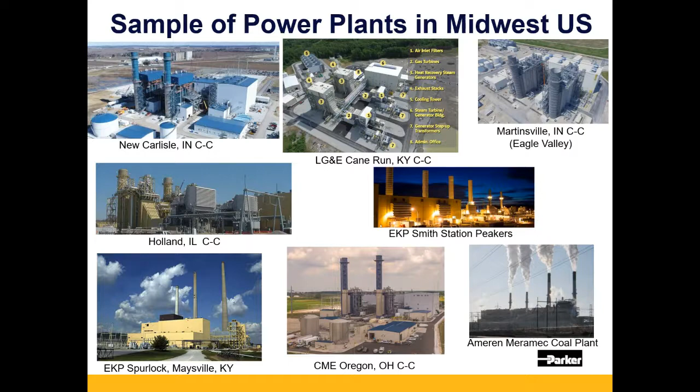So real quick, this is just a view of some of the power plants across the Midwest U.S. We provide products into pretty much every type and style of power plant that's out there. But as many of you may know in the industry, there's been a steady shift from coal to gas. So we've seen a vast increase in the amount of combined cycle plants, but still coal plants provide a significant portion of the base load today in this region.

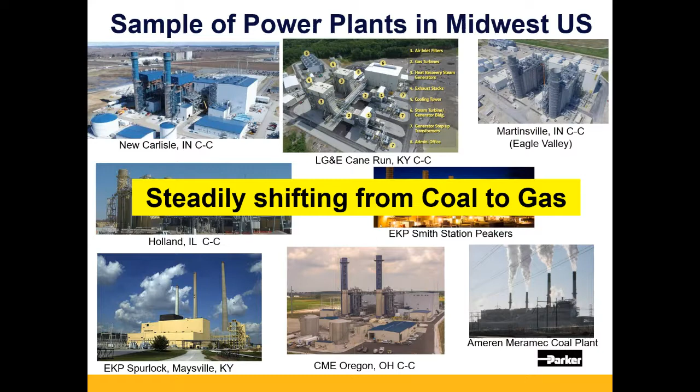But we are seeing the continual development of these gas turbine combined cycle plants, and that's one of the areas where Parker has a significant footprint and can help support the plant's needs and usages, which may be a little bit different from the coal plants.

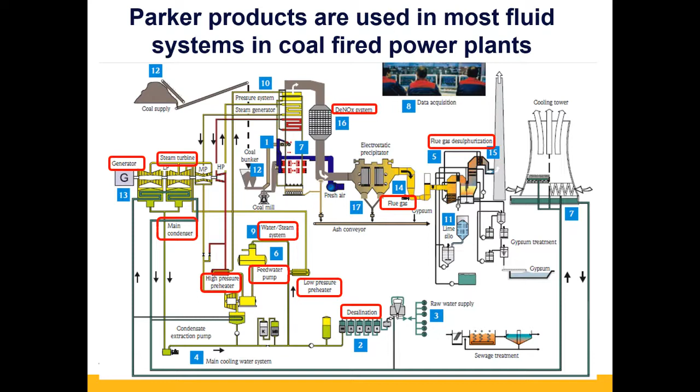So this is just a quick look of a coal-fired power plant and some of the areas where you'd see Parker instrumentation product being used. This would be fittings and valves and connectors and tubing. It would be things like the generator and the steam turbine, DeNOx systems, basically all these boxes in red. So you can see pretty much most of the fluid systems in a coal-fired plant would utilize Parker or instrumentation products in general to support their process control instrumentation needs.

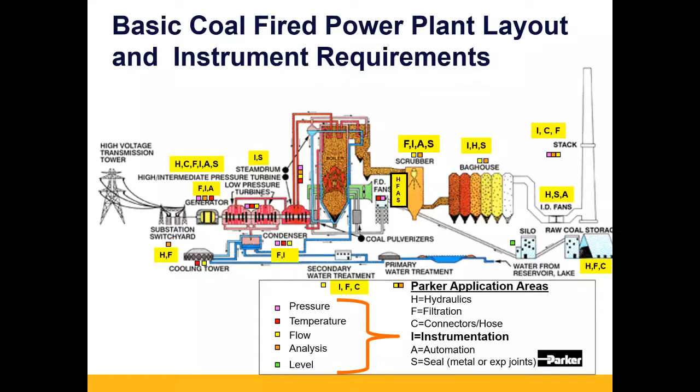This is another look of a coal plant, and this is kind of a Parker overall overview of all the different things that Parker does, from hydraulics and filtration and connectors and hose, and where those products may be used. The interesting part about this is, although Parker is very large and has an incredibly broad offering, we make over a million different types of products. Within power plants, Parker instrumentation is by far the most broadly applied and used product for all the different fluid system applications you'd see throughout a plant.

One of the examples that showcases a little bit of the range of these is on a boiler water feed system within a coal-fired plant. And depending on the age of the boiler and the temperature of the boiler, whether it's subcritical, supercritical, or even ultra supercritical boilers, which there's not a lot of in the U.S., but there are some, we offer products that can go to extremely high pressures and handle very high pressure steam applications within those plants.

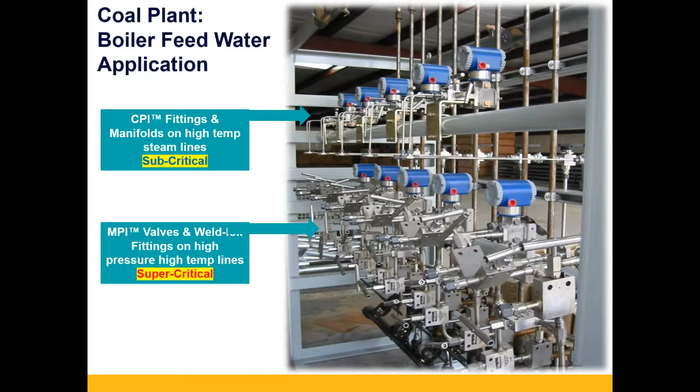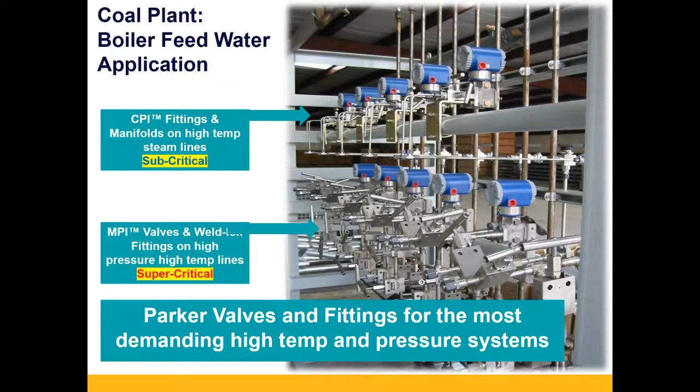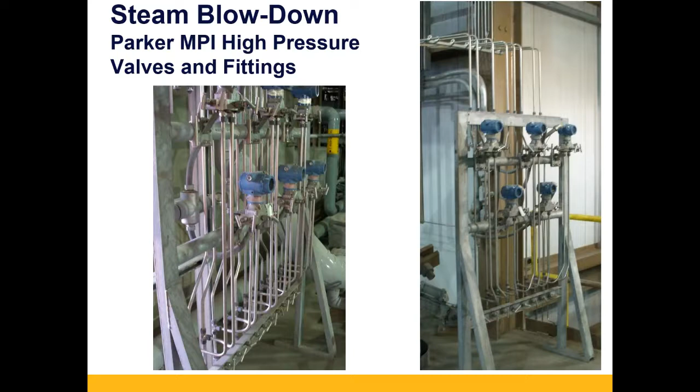So we make a variety of products that are catered to the different ranges of pressures and temperatures that you'll see throughout a plant, and pretty much any of the more demanding high temperature and pressure systems across a power plant. This is just another shot of some of the tubing runs with different Parker high pressure valves and fittings that are applied for steam monitoring and blowdown within the facility.

We also make a wide range of fittings that are used throughout plants. The most common one is the compression fittings that people commonly use for bin stocking and for most of the process control instrumentation within a power plant. But we also provide a lot of weld fittings for high temp steam lines, particularly in a combined cycle plant off of the high pressure steam drum and sometimes the medium pressure steam drum coming off the boiler or off the steam drums and running down either to the instruments or to the water analysis shelter.

And then also we provide a lot of adapters for a wide range of equipment that could be coming in from different parts of the world. So oftentimes these facilities are built with a hodgepodge of equipment that may come in from not only domestic U.S. suppliers, but from European suppliers in Germany or Italy or France or the UK, or also coming in from Korea or Japan. Some of the OEM equipment could be coming from there.

So we make adapters that allow you to adapt and change from BSPP and metric connectors and try to convert the system to imperial units. So that can be important to try and help standardize and simplify the plant plumbing after it's been built.

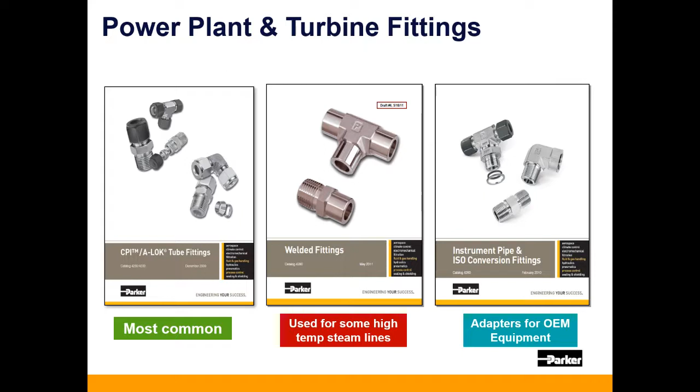Our primary product for process control instrumentation is the CPI fitting. This was really designed for the wide range of difficult applications within a power plant and can be used in pretty much any fluid and gas system. It's by far the easiest to install. It handles the thermal cycling and vibration that you would see around typical power plant equipment, and we found it is by far the safest product to use for power plant applications.

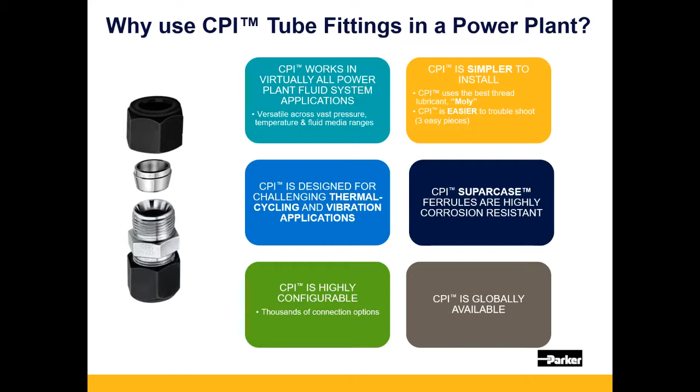We also have a range of valves in our portfolio that are B31.1 compliant, realizing that in many cases power plants don't necessarily need this, but there are certain applications where you do have requirements for B31.1 compliance, and we do provide fully tested and certified valves to meet those standards. And typically it's the more difficult, challenging, high pressure, high temperature applications where that's most important.

One of the key products within that range, one of our marquee ones, is our union bonnet valve. This again is used for steam isolation and blowdown, whether it's around the water analysis shelter or whether it's for monitoring the steam flow. It's a great highly versatile power plant valve that's been used all over the world.

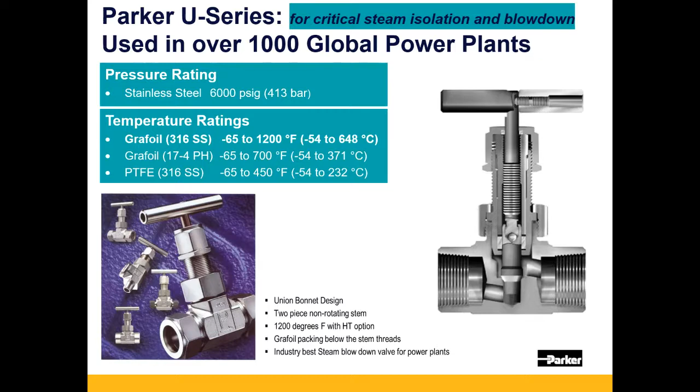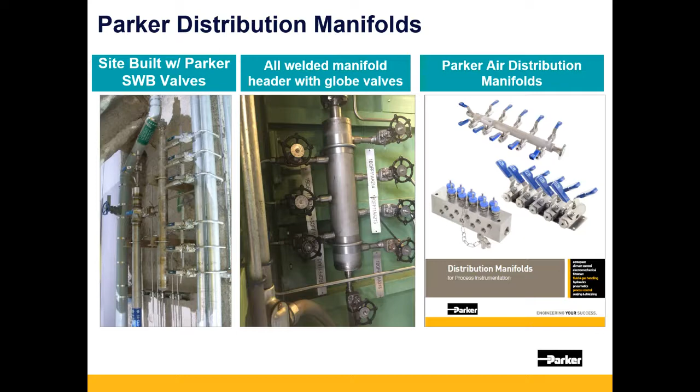We also make things like air distribution manifolds, and these are things that have been historically maybe more site built and fabricated with basically welding and screwing together many components. You can see a couple different styles here, but we've actually come out with some prefabricated versions of this that can help simplify plant maintenance and are used for both new plant construction and also mods and upgrades within plants.

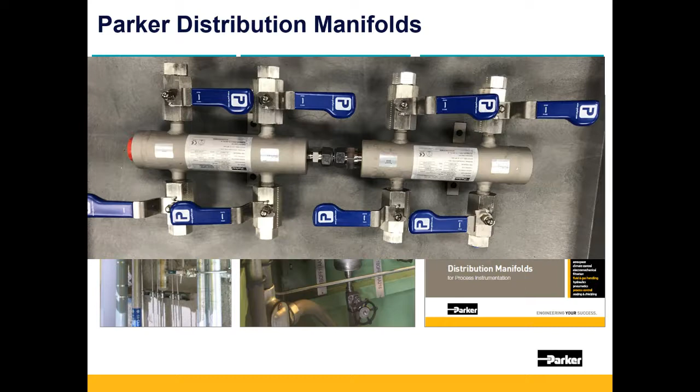So you can see even a modular system like this, you could have a 4-valve block and string 2 together to make an 8-valve block. These are very versatile and come completely certified for a wide range of typically gas distribution within a plant, and are often used as air manifold headers.

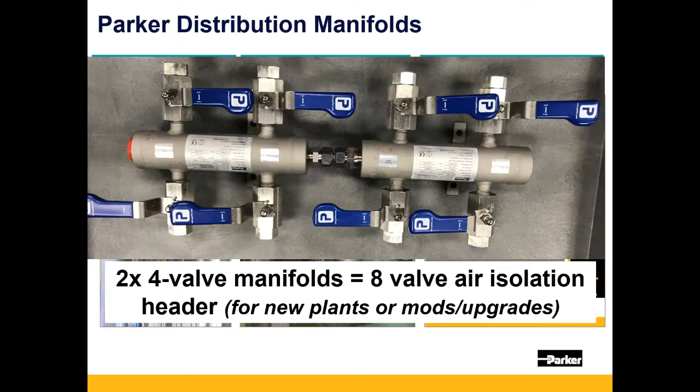So, continuing on with other products for the continuous emission monitoring systems within both combined cycle and coal-fired plants, we make a wide range of products, including changeover systems and even things like our Intraflow modular gas control product that can be used to control the different gas streams within the emission monitoring system.

So we have a wide variety of products that go from the gas bottle connecting up through the stack sampling system and down and through the shelter itself. So everything from regulators to connectors and valving. So a pretty broad mix just for the CEM systems alone.

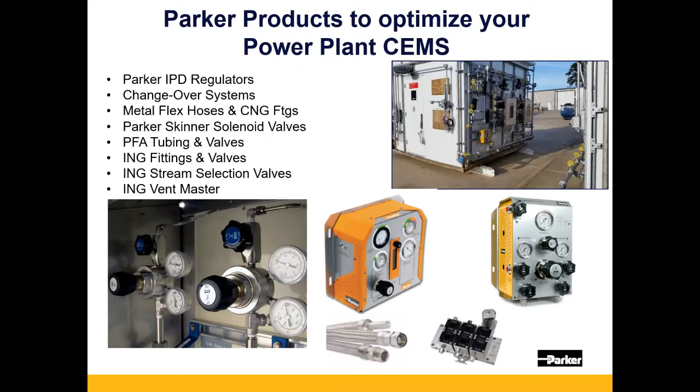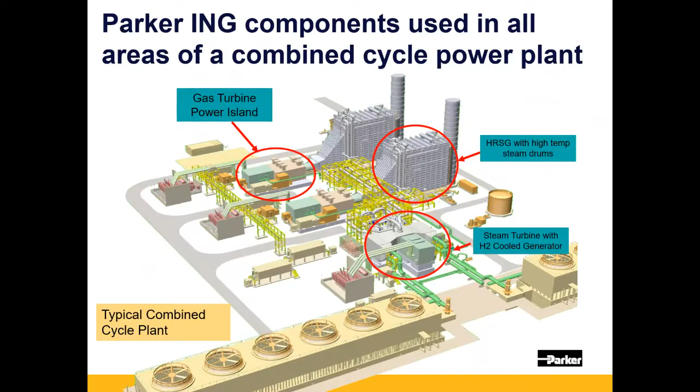Parker has, as I've mentioned, a wide range of products that are used in the combined cycle portion, typically centered around the gas turbine itself, the heat recovery steam generators, and the steam turbine, as well as some of the balance of plant throughout. So going through some of those areas, these are the typical areas that you would find within a power plant that are using instrumentation products, and that we've actually developed some customized solutions, which I'll get into in some of these types of systems.

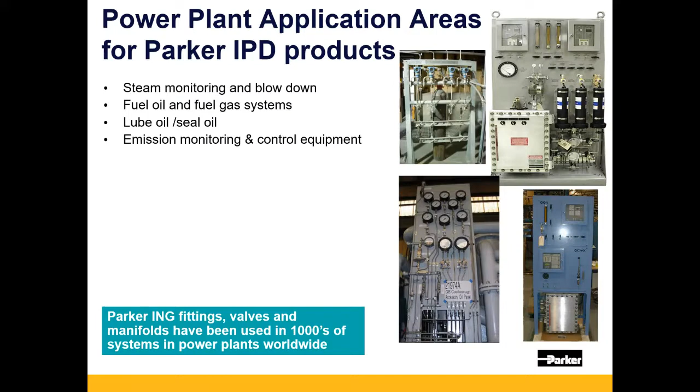So these can be used as mentioned here for steam monitoring and blowdown, fuel oil and fuel gas, lube oil, emission monitoring and control, which I just mentioned, water injection and water wash, boiler water analysis, inlet fogging. So you can see a wide range of applications within the plant, and that goes back to what I originally mentioned, the broad application of these products.

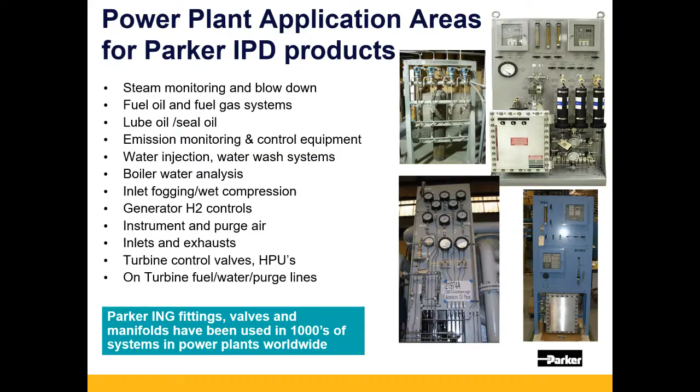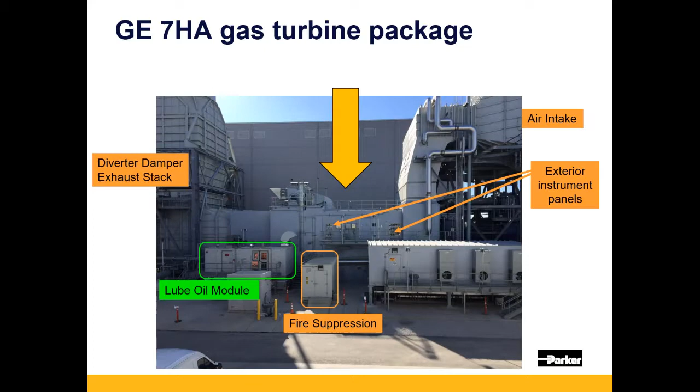So here's some examples of where you would see these within a power plant, also including some of the OEM equipment there. This is an example of a 2-on-1 combined cycle plant, and I'll zoom in on the lube oil module here. This is where you'll see Parker fittings and valves that are used as standard on any of the lube oil and auxiliary equipment that support most of the GE equipment within the power plants.

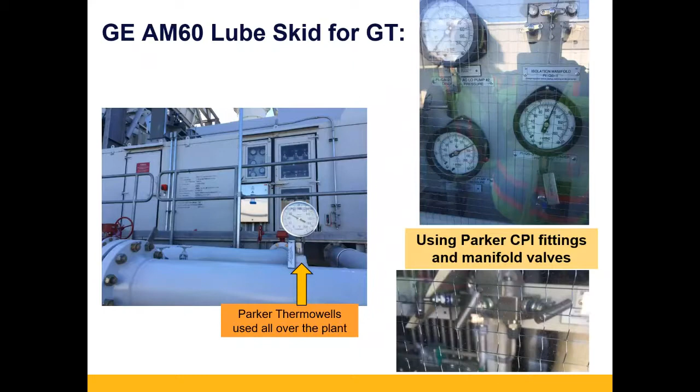You'll see our products, fittings and valves around things like fuel gas separators that could be coming in from overseas. Also for low molecular weight gases on the hydrogen systems. Those are typically replete with Parker CPI fittings and ball valves and needle valves that have been customized for use in these hydrogen systems. So pretty much anywhere you see a GE generator, you're going to have some of the Parker components in there.

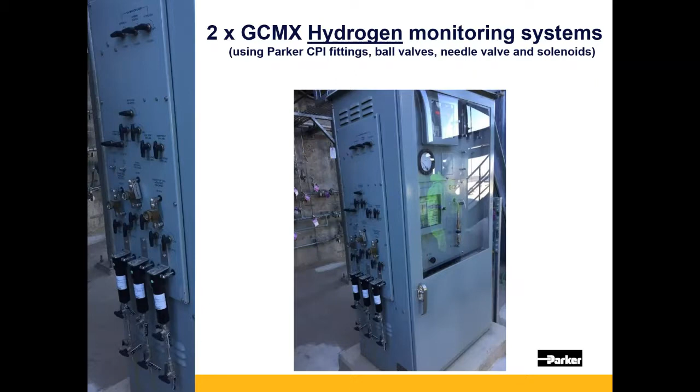Also in diverter damper control systems, these are a little bit more rare in the U.S., but there are some combined cycle plants that do have these. This is basically a large hydraulic power unit that controls the diverter damper door, so you can run the plant in simple cycle or combined cycle.

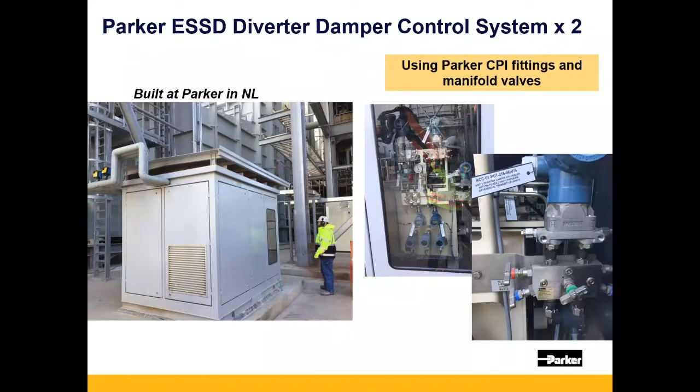It's just a large multi-ton steel door that controls the exhaust flow off the gas turbine. But these hydraulic systems will use a significant amount of Parker product as well, and we actually make the full turnkey diverter damper system at one of our facilities over in the Netherlands. So just kind of an interesting side note.

Another area where you see lots of Parker fittings is on auxiliary duct firing systems, which many of the gas turbine plants have to either maintain a boiler temperature if the turbine trips, or to augment the power.

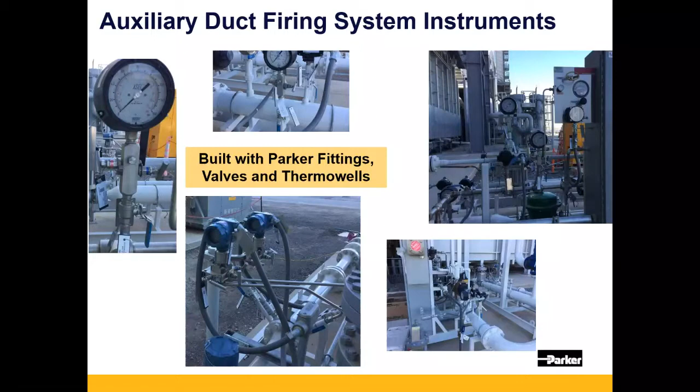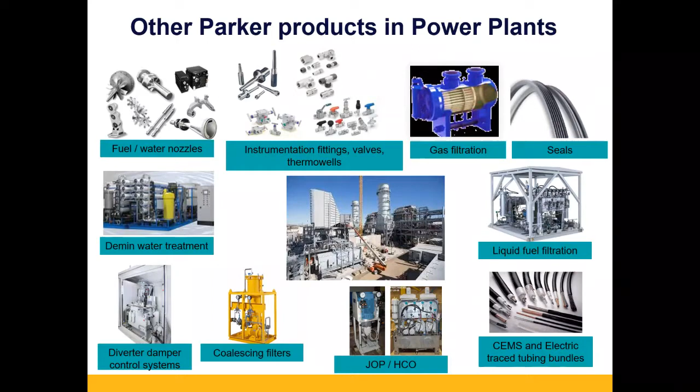Other Parker products that we make that go into power plants: as I mentioned, Parker has a pretty broad portfolio. So a lot of on-turbine equipment like fuel nozzles on many of the major gas turbine OEMs will use those, but we also get involved pretty much upstream and downstream of any fluid system, whether it's natural gas, liquid fuel, lube oil, hydraulic, pretty much all the auxiliary fluid support systems within a plant. But by far, the most common one that you'll see is Parker instrumentation products in the plant.

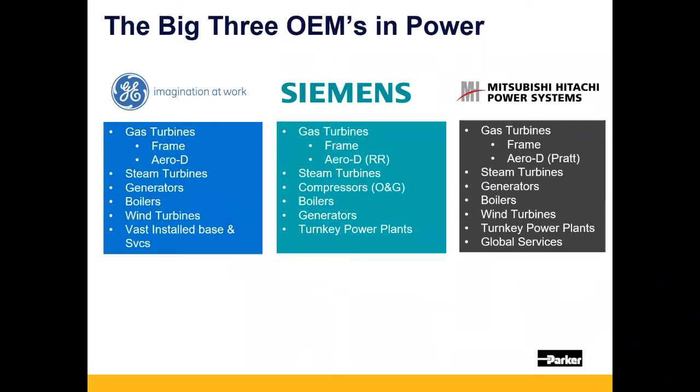Real quickly, these are who we view as the big three OEMs in the power generation space that have the broadest portfolios and roughly competitive portfolios that stack up against each other. So GE, Siemens, and Mitsubishi have a pretty large footprint. Parker has a pretty large bill of material content on the GE and Siemens side.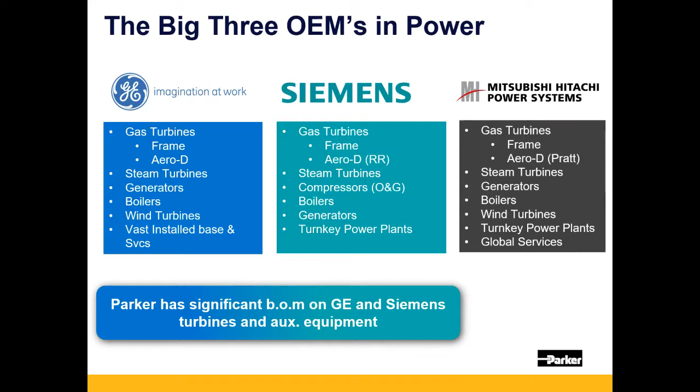Part of that is due to the fact that we're on the specifications and have developed a lot of bespoke, customized equipment, as well as providing standard product to both GE and Siemens. So if you have this type of equipment in your facilities, we have a pretty broad range that can support those.

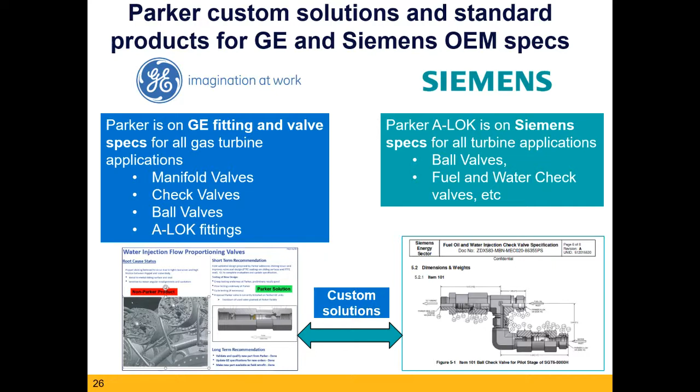One of them is the Parker check valves that we make for purge air, liquid fuel, and water injection. We spent a lot of time developing this product for this specific application, but it can be used for other challenging check valve applications, but it's particularly good for dual fuel gas turbines.

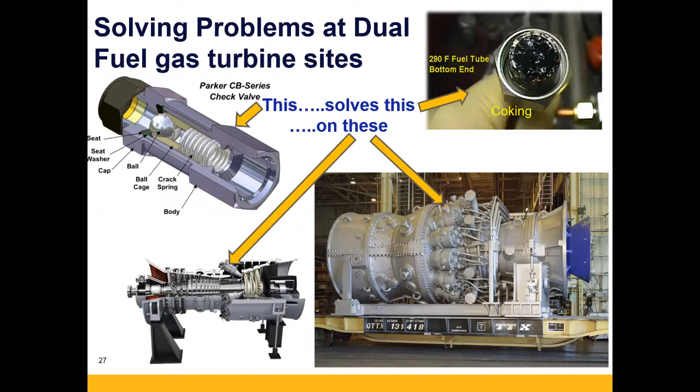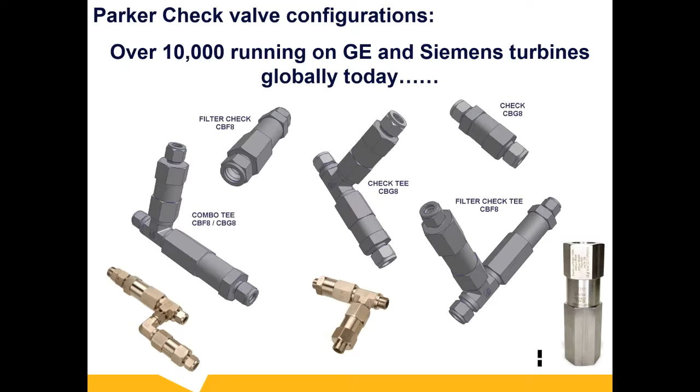And so we've been able to eliminate a lot of coking issues that dual fuel gas turbine operators have seen in the past. And we've put over 10,000 of these out on OEM equipment around the globe in a wide range of configurations. So pretty interesting product line.

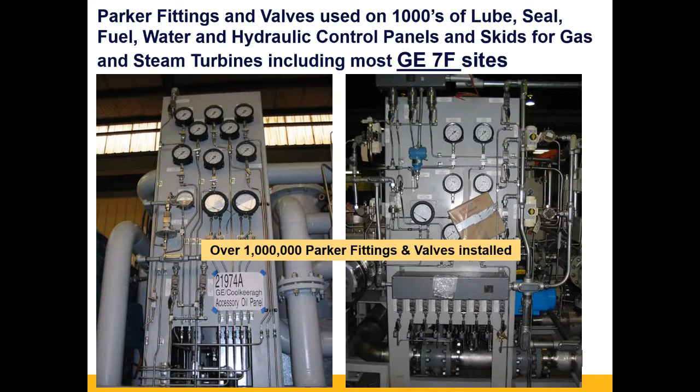Parker has also provided product to auxiliary equipment fabricators, again, lube oil, seal gas, seal oil, liquid fuel, water, pretty much all the gas and steam turbine auxiliaries, and we've put over 1 million fittings and valves on a wide range of this equipment that's been installed all over the world. So if you do have OEM equipment that was built by GE or Siemens, chances are there's some Parker product that we can support on that.

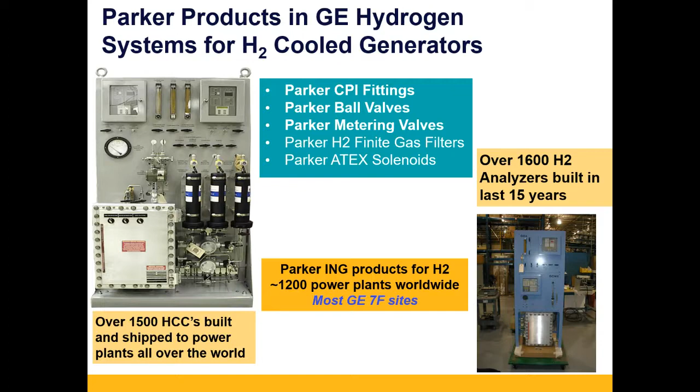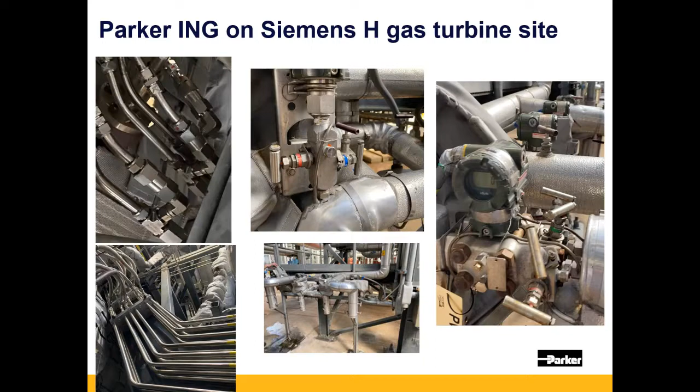We've also provided a lot of interconnect tubing and piping and fittings and valves for different turbine applications. This is just an example of some of the tubing runs and check valve tees and manifold valves that have gone into Siemens dual fuel gas turbine sites.

We also have a range of product for instrument and control project work, and also for outages. So just a real quick portfolio here. Mostly on the left side is the tooling that we provide. So we provide bending equipment, tube fabrication equipment, also hose fabrication equipment to make it easy to fabricate and assemble the products and systems safely on site. These can be very helpful for outages, but also for routine maintenance at power plants.

And then on the right side are some of the customized solutions that we have for power plants, including calibration, fittings and quick couplers, specialized valves for challenging power plant applications, as well as a wide range of manifold valves for pretty much any transmitter manufacturer that's out there. We've worked with pretty much all of them.

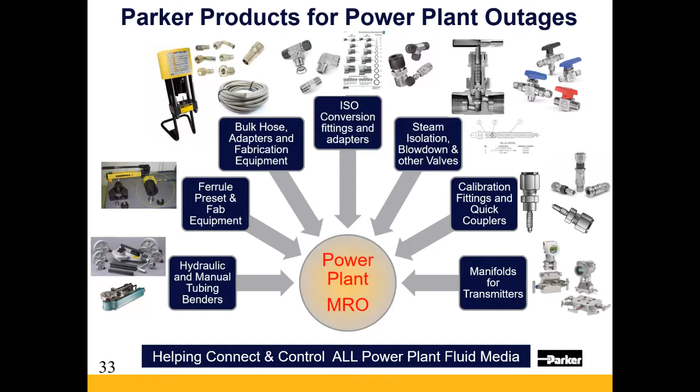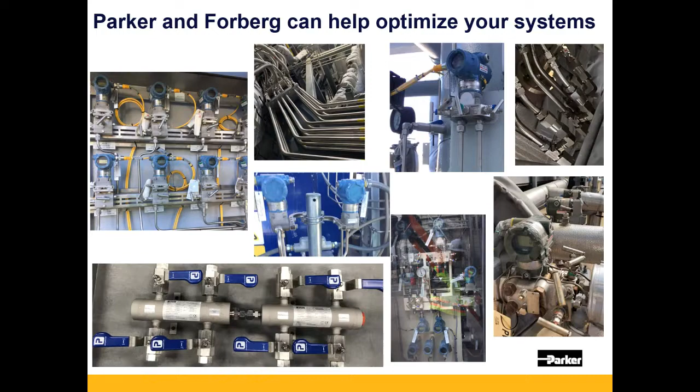So again, in summary, Parker and Forberg can help optimize and fine tune your power plant needs and requirements. We're here to help you in a lot of different ways. We also offer safety classes, so we can do on-site training that covers everything from fitting and valve and tubing selection, customizing it for specific applications and media. We can do certification for the maintenance crew or for the outage crew.

The SBEX program, that's our small bore expert program, which we offer. We offer free classes and certification for any power plant sites and also for OEMs, and can help reduce corrosion issues and other challenging problems that you might see at site. So anyway, those are some of the things that we offer.